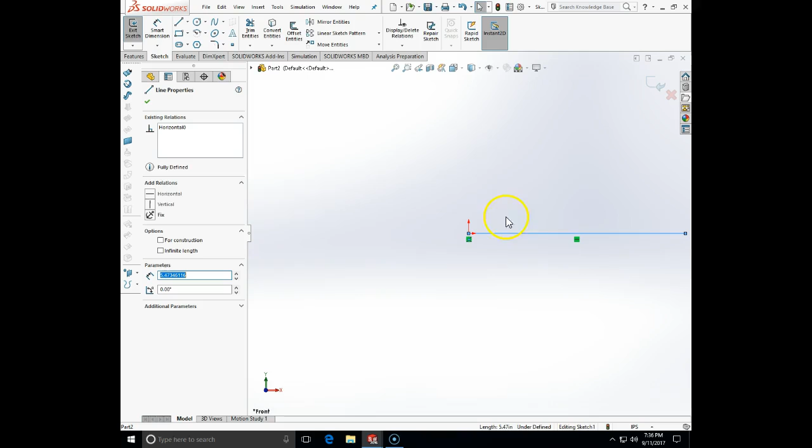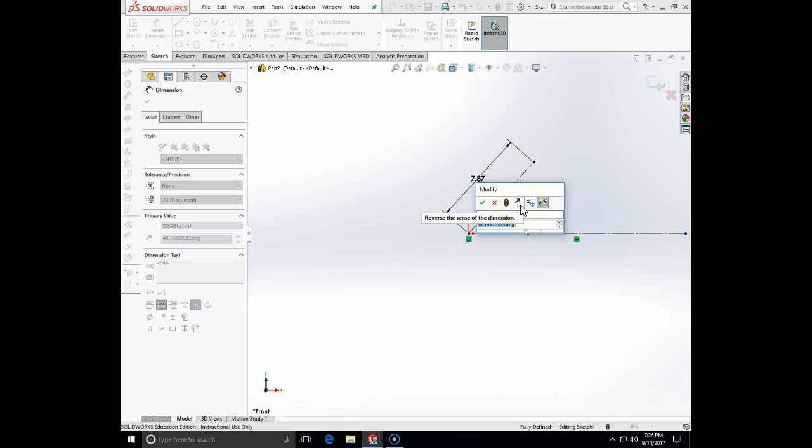We start by making a sketch in the front plane, making a horizontal axis, then another axis from the origin up with an aligned length of 200 millimeters and an angle between the horizontal and the length of 60 degrees. Change my units to mmgs and continue sketching.

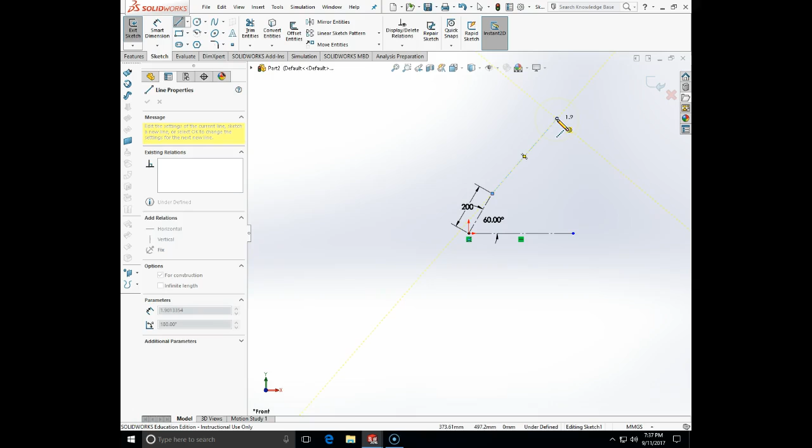Now from that point I make another construction line with an angle of horizontal of 15 degrees and an aligned length of 400 millimeters. This will define the basic geometry of my arm.

Now I'm going to put the construction lines. I will start by placing circles, and then connect the circles with tangent lines.

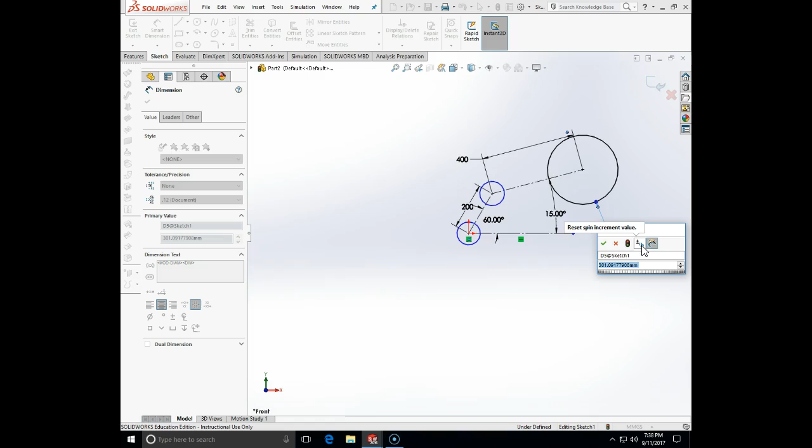Specify that this circle has a radius of 12.5, so that's 25 diameter. Is that supposed to be shown on screen?

Okay, we do the first polar line, then the second polar line. The first polar line is 60 degrees with a length of 200, and the next polar line has a length of 400 and an angle of 15 degrees from the horizontal.

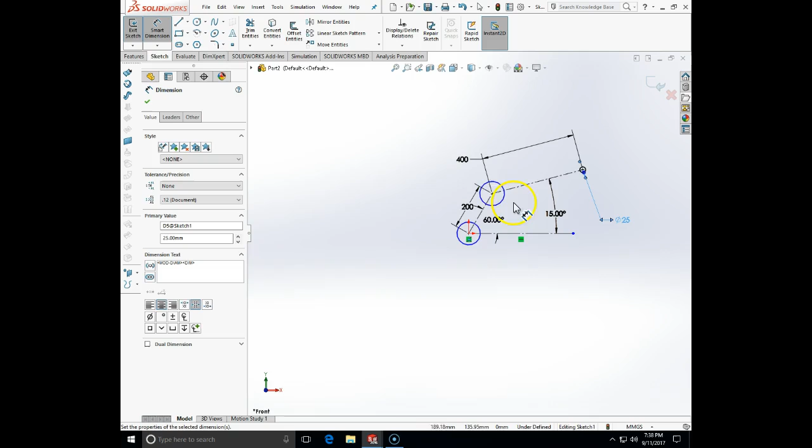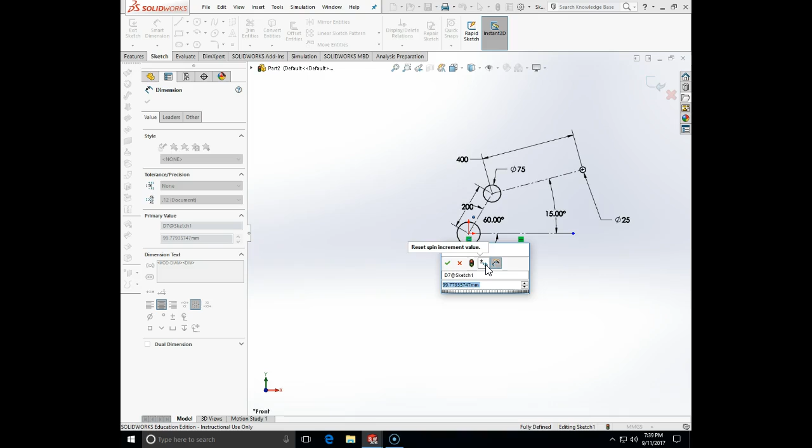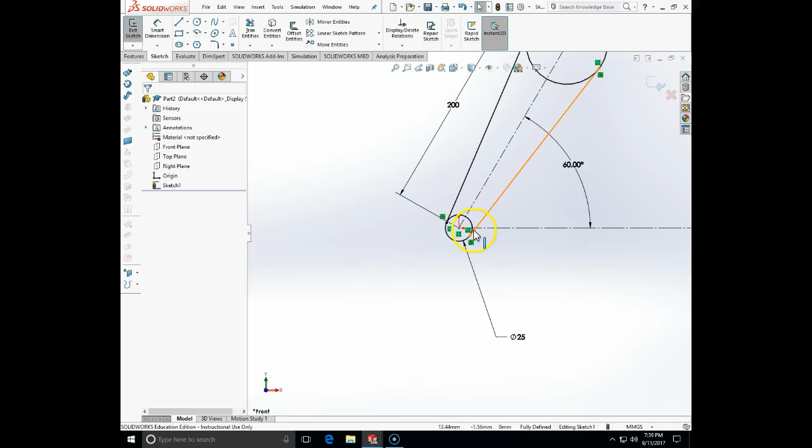Now we will connect the circles with tangential lines. As you can see, as I hover close to the circle and attach to it, then go to the next one, it automatically inherits the tangency relationship if I hover in an area where it will be tangent.

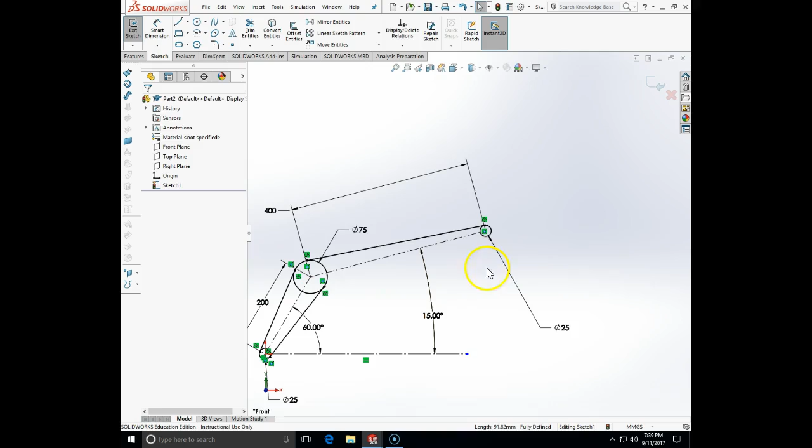Now same thing from here, need to zoom in a little bit. See, it's tangent and coincident, tangent and coincident, and the same things will apply.

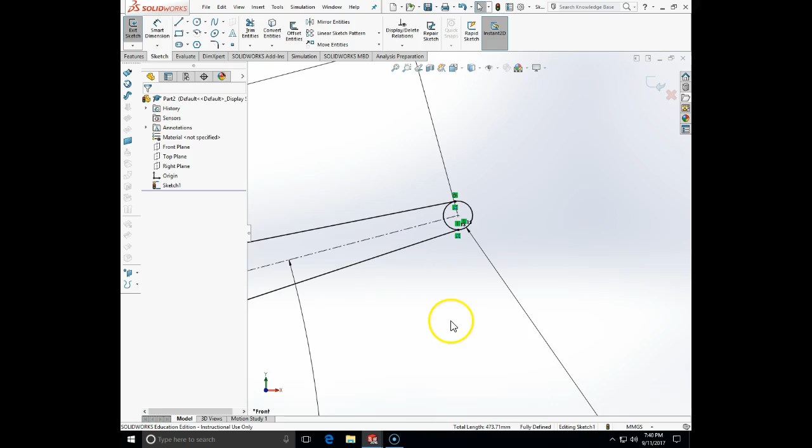At the bottom we need to click on the circle and circle to make them tangent, and here I'm going again to click line and circle. Actually, this is already set, okay.

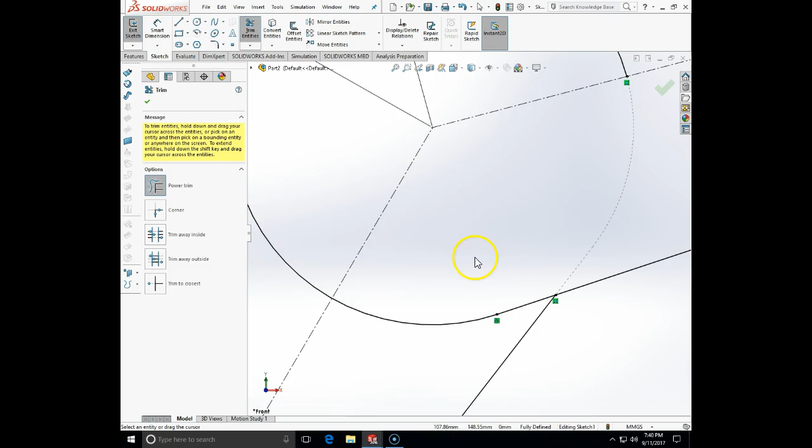Now what we can do, we will have some area of confusion here. So if I go to power trim, I can successfully trim these lines to clean out this sketch. As long as I just trim the circles, it should stay fully constrained.

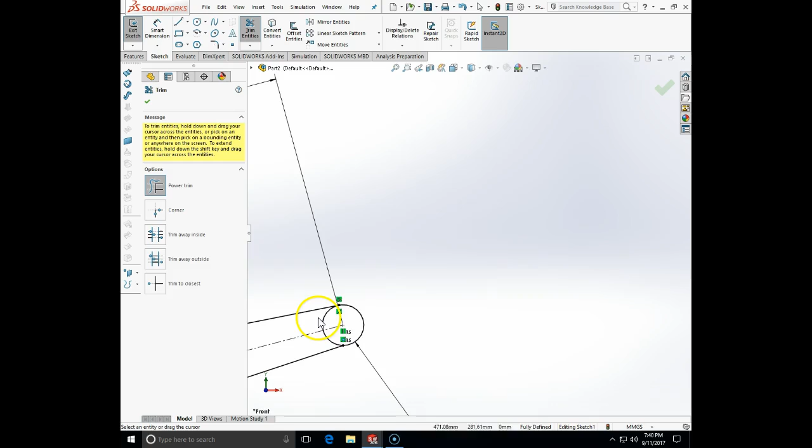Now I see where the problem is, so I will erase this vertical relationship and make this tangent instead, which fixes it. Okay, so here is my cleaned out sketch.

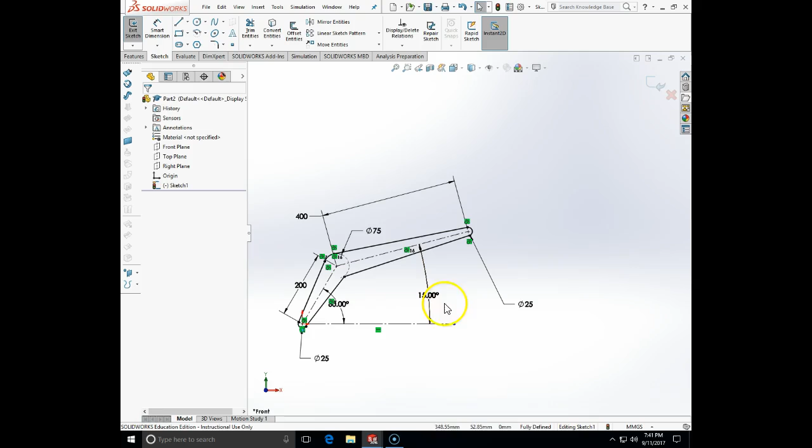Now I'm going to extrude this sketch for 10 millimeters, and create a new sketch on top of it that will define the pivot point. So I will close this sketch, extrude the object for 10 millimeters, then start a new sketch on the top surface.

I'm going to place 3 points, 1, 2, and 3. Now I'm going to make this point and the bottom circle concentric, this point and the middle circle concentric, and the last point and the circle concentric. And this defines my arm.

Why did I create this point? These points I will use to create a functional assembly by mating point to point. Going to close the sketch, and I will save this as an...

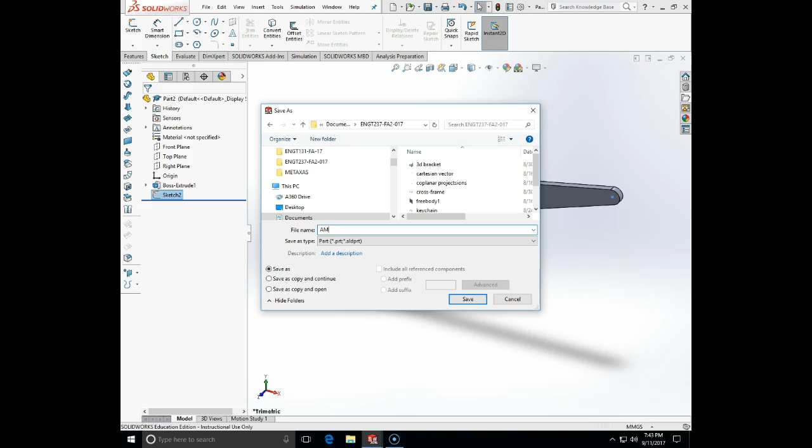I will call this one the arm-press.

Now I'm going to create the next part, and the next part will be my link. The link is a very simple sketch. On the front plane I'm going to use the slot, the straight slot.

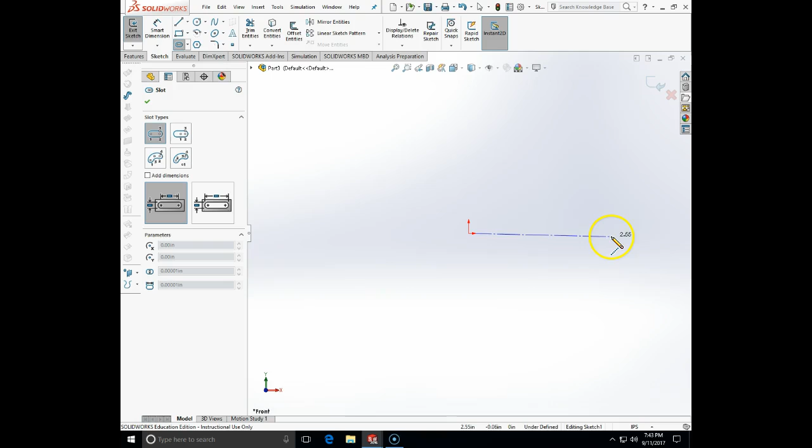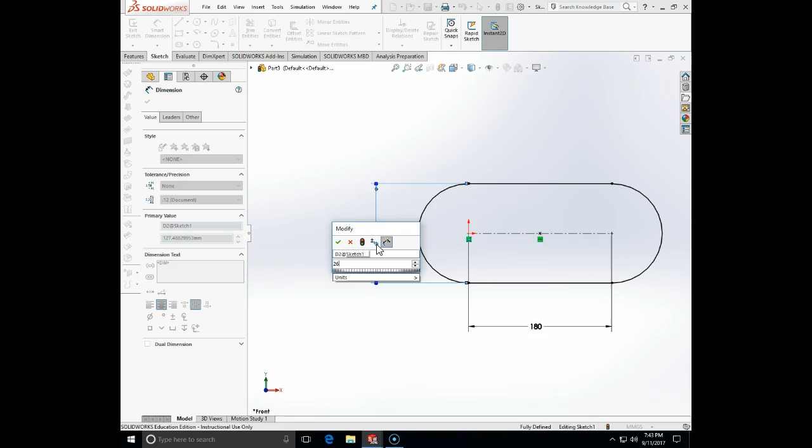Again I will need to change this to millimeters units. The center distance of the slot is 180 millimeters, and the diameter of the slot is 25. And I'm going to extrude my link, again 10 millimeters.

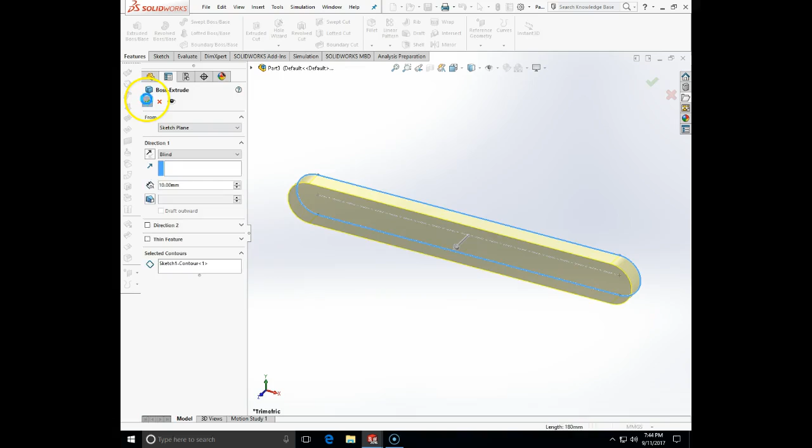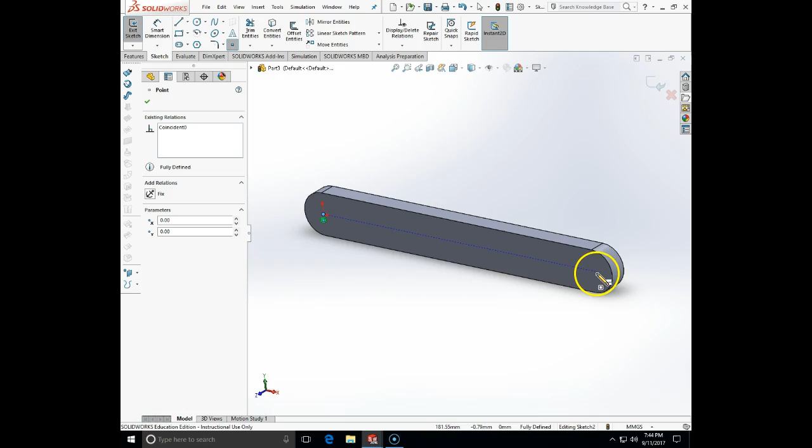I'm going to create, now on the front plane, here 2 points: one concentric with one end of the slot, and a second one concentric with the other end of the slot, and I'm going to save it.

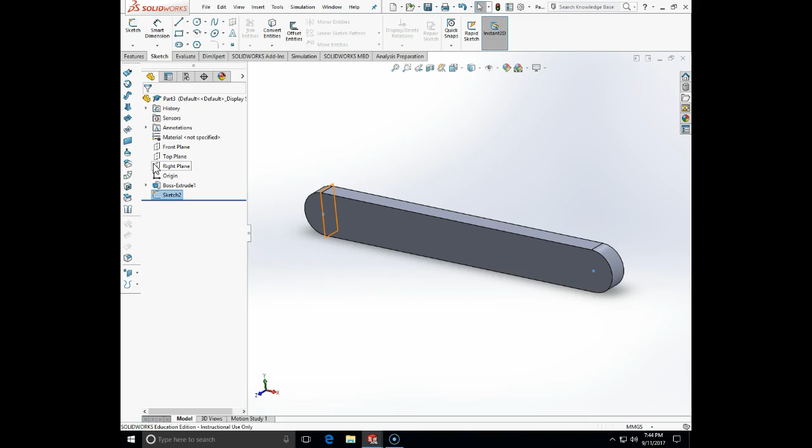One thing that will make it easier to assemble later is to avoid doing the z-axis. Actually, we don't need to do that for now. Let's see it this way. We can do it. Okay, I will save this as a link, save as link dash press.

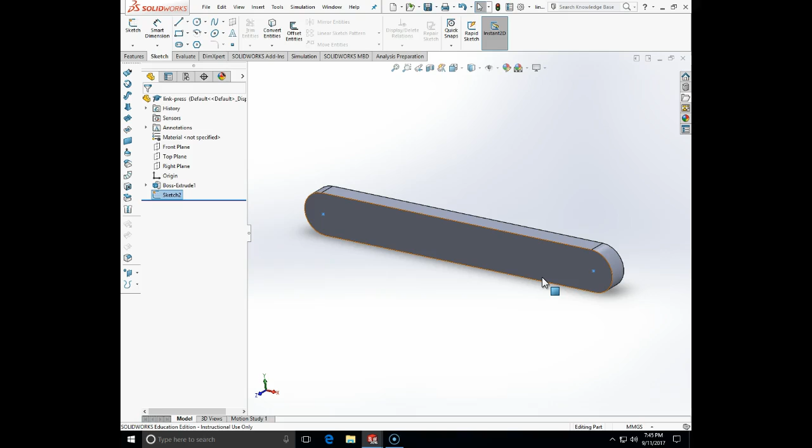And the last part will be a die, and then we are going to assemble those together. The die is also a very simple part. Going to make a very simple center point rectangle.

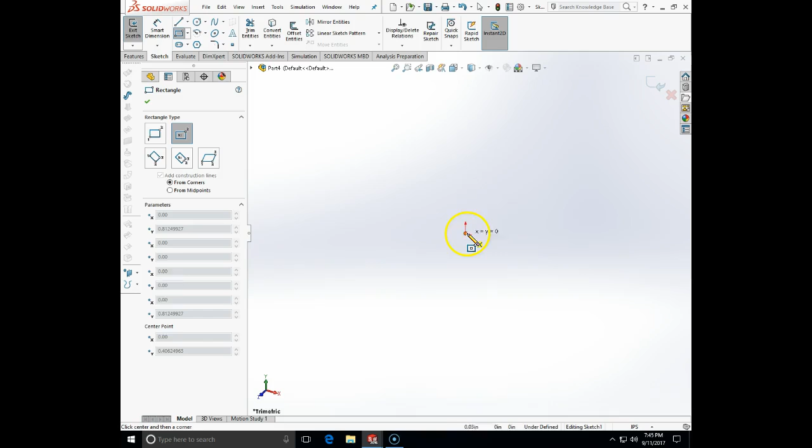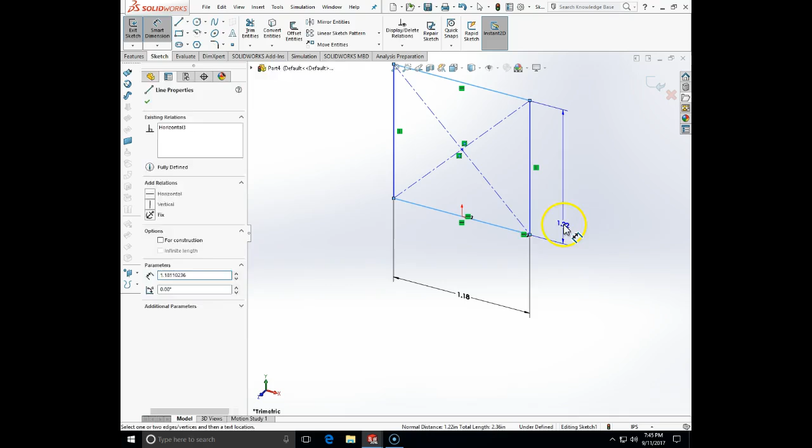Going to create the length of that rectangle to be 30 millimeters with a height of 15 millimeters, and we'll have an arc starting from the middle point, and we will say that the center and center are vertical. This fully defines this piece.

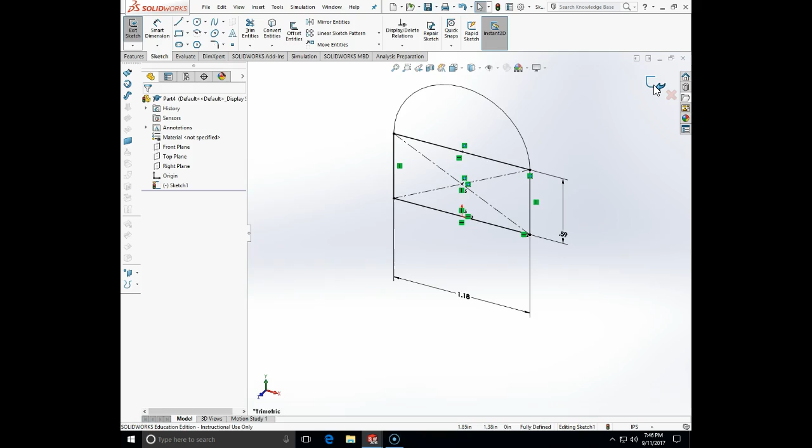And I'm going to make also another point here, so I'm going to extrude this piece for 10 from a mid plane. Go to the extrude, 10 millimeters, and it will be a mid plane, and I will choose both options.

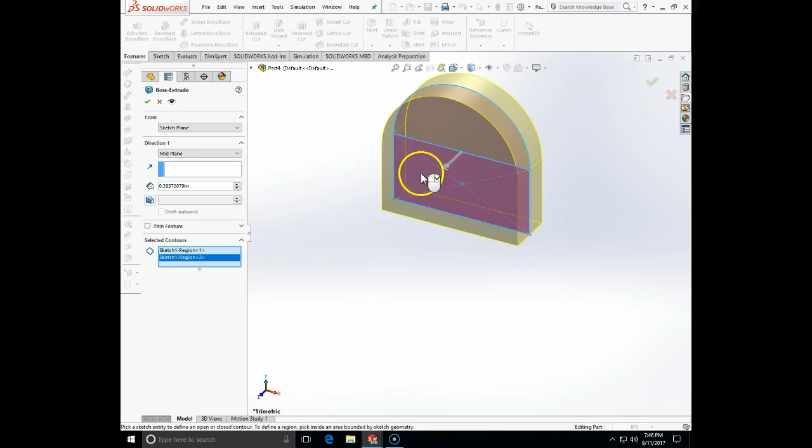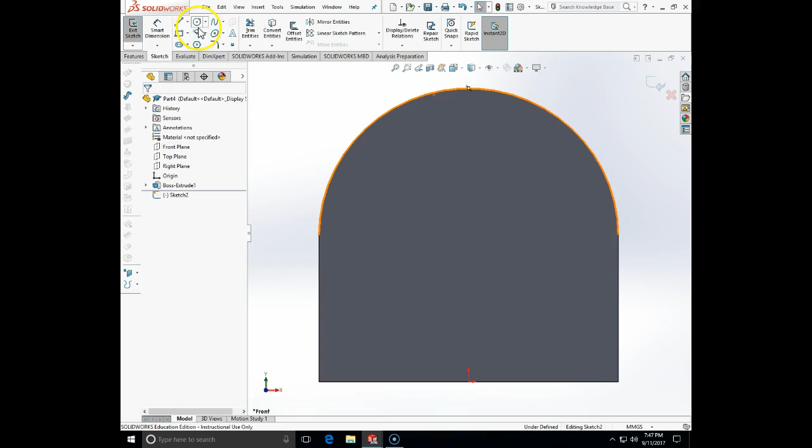Now we are going to create the bottom circular piece, and that will again be the sketch on the front plane, and this time I'm going to make a revolved piece by making a rectangle.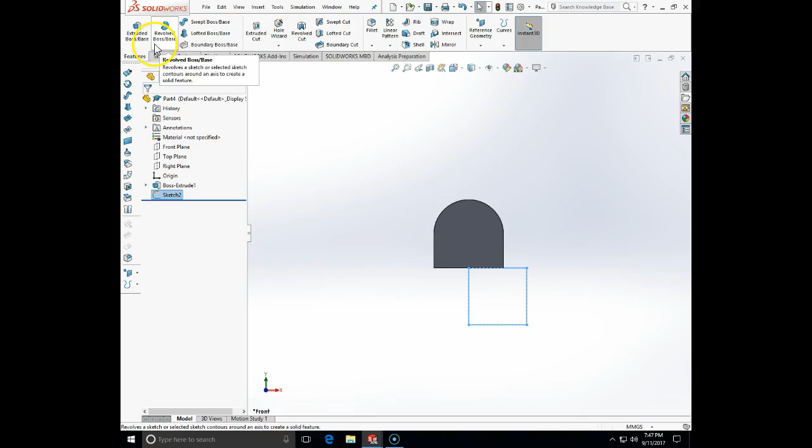Which will be 25 millimeters by 25, essentially a square, and then revolving it around this axis. So I close the sketch, feature, revolve boss base, axis of revolution is the left edge, and here is my die.

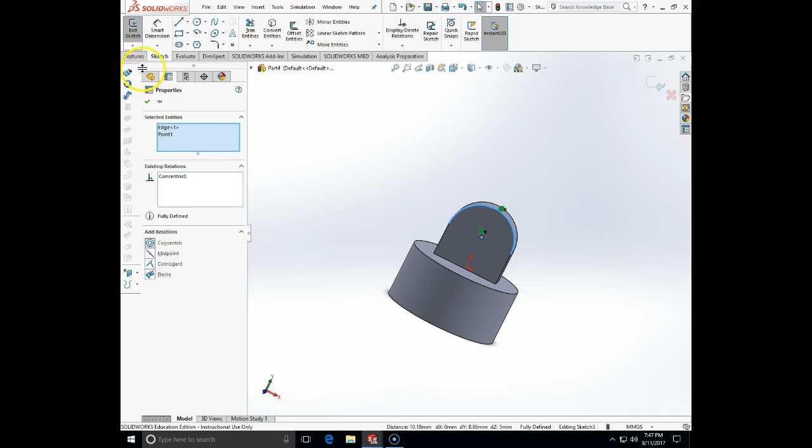I'm also going on a front plane to start a new sketch, and I'm going to define a point which is going to be a center point of the die. And I'm going to save it.

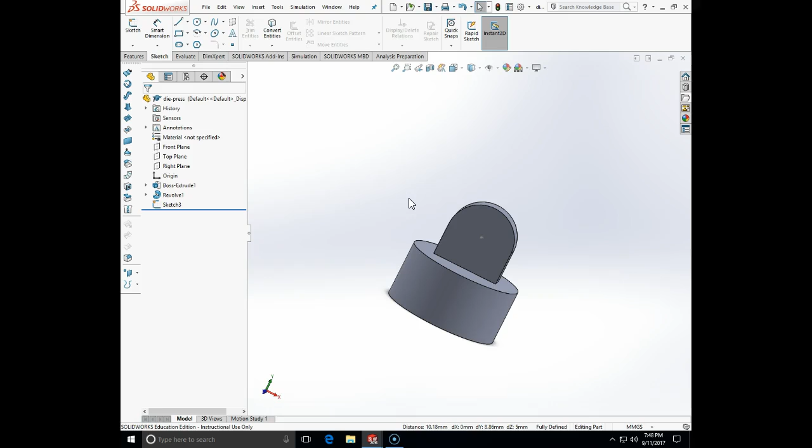Now the key is to make the right mates in assembly. So let's start making assembly, let's start making a new assembly. And we are going to insert all of the components. So we'll start by arm, and we just drop them inside.

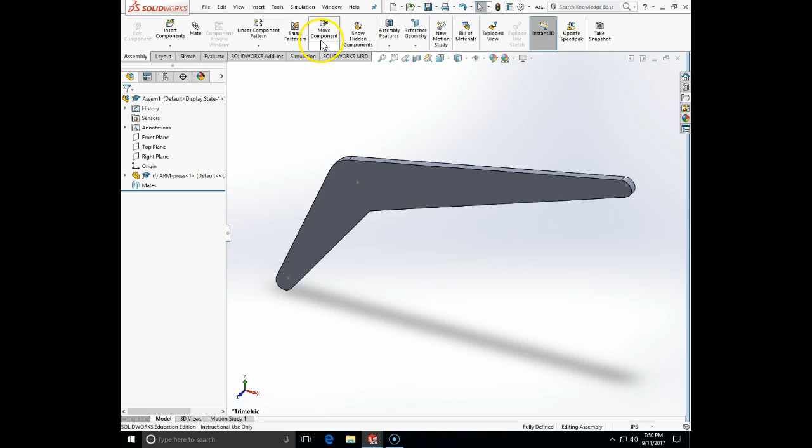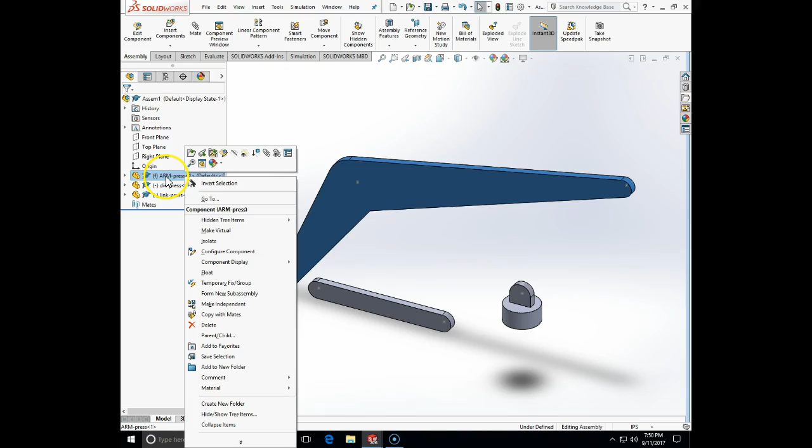I will insert another component, die press, and I will insert another component, link press. Now we need to make our arm float, otherwise it will not work. So right click on the parametric tree for the arm, and let's make it float.

Now we will make everything not as a completely correct geometric model, but actually as a 2D model which will have the right kinematics. So to do that, we will make all of the front planes coincident.

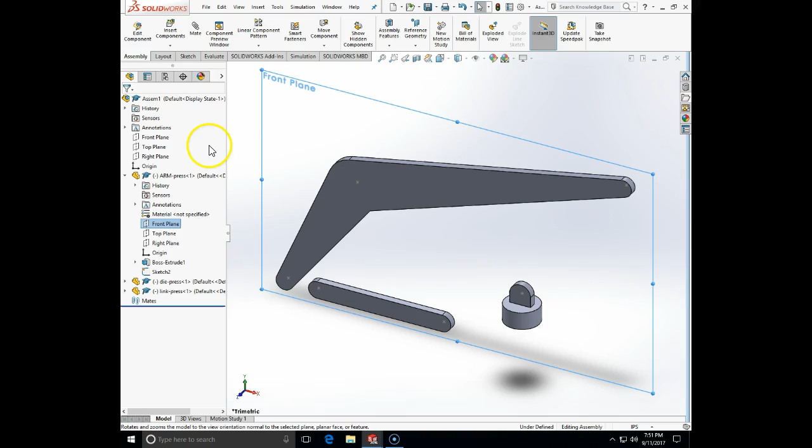So I'm going to choose the front plane of the arm and press shift and my global front plane, so mate. I will choose the front plane of the arm and our global front plane, and I will make it coincident.

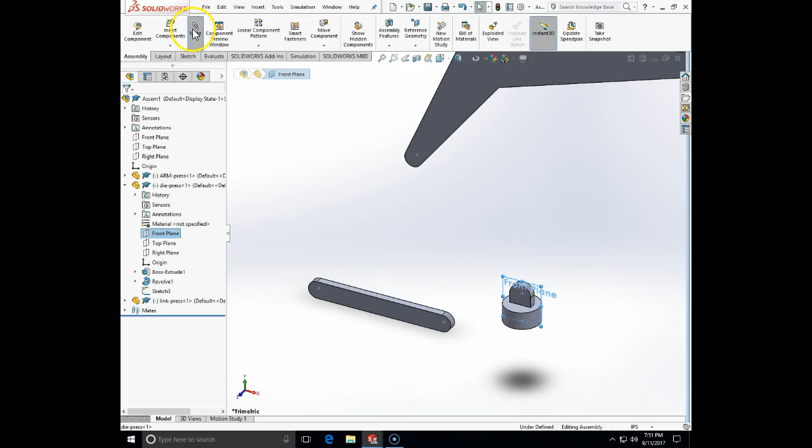Now I will repeat the same thing for the front plane of the die, mate it with the global front plane, and finally I'm going to do the same thing with the front plane of the link, and mate it with the global front plane.

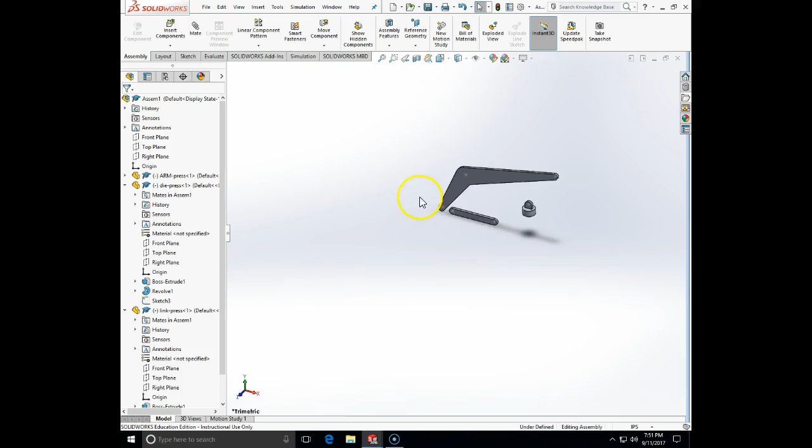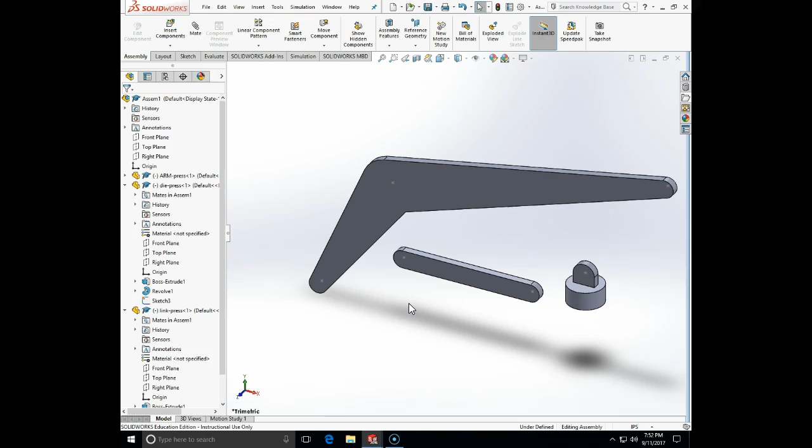After I did this, I'm going to start actually assembling the functional kinematic sketch. So I'm going to create a mate point between the left point of the arm and the global origin. I will choose the left pivot point of the arm and the global origin, and make this a coincident mate without aligning the axis.

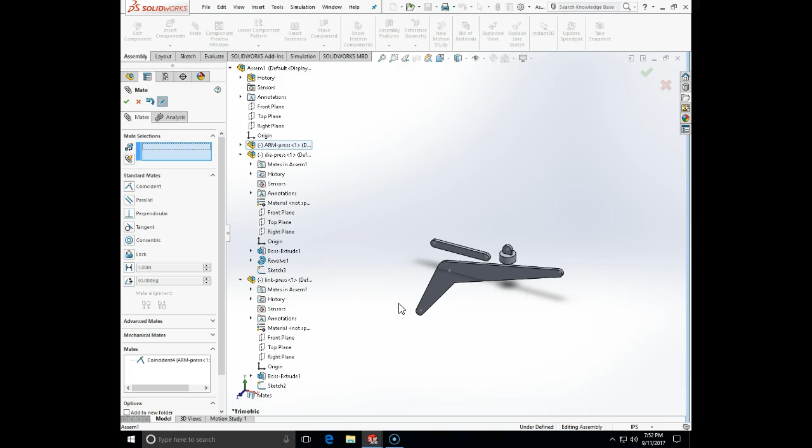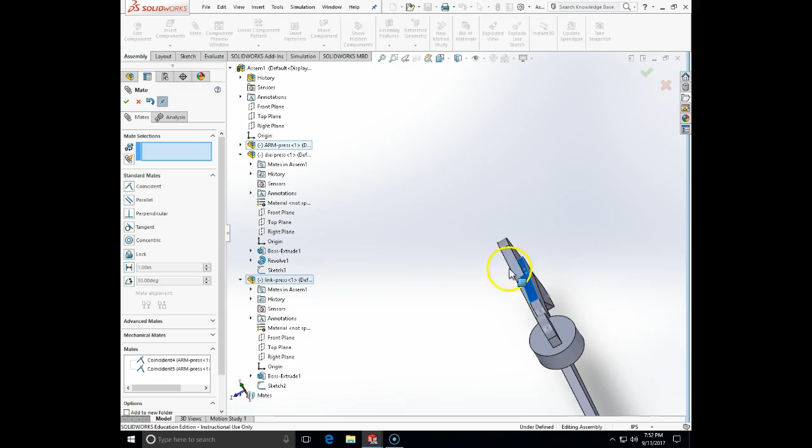Now I'm going to create another coincidence between this point and the center point of the arm. And let's see, and then coincident with the other point of the link and the point on the die.

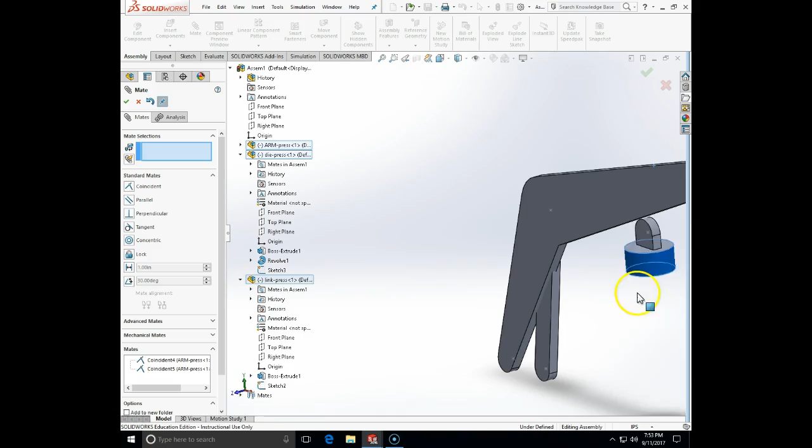So I'll drop down the die, and I'm going to make a coincident mate between this point and that one.

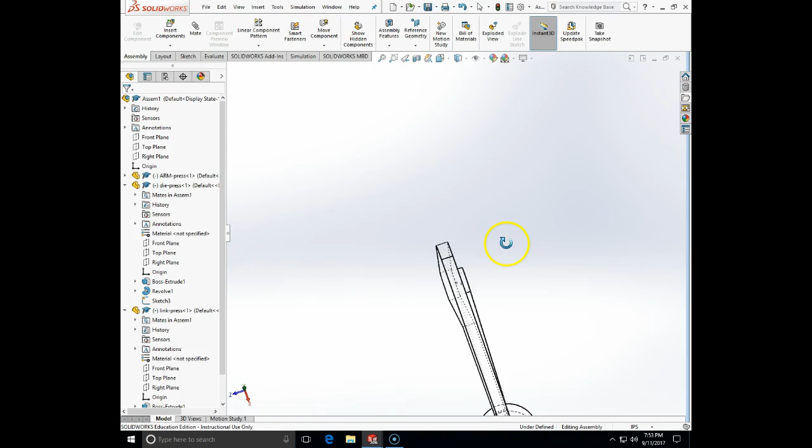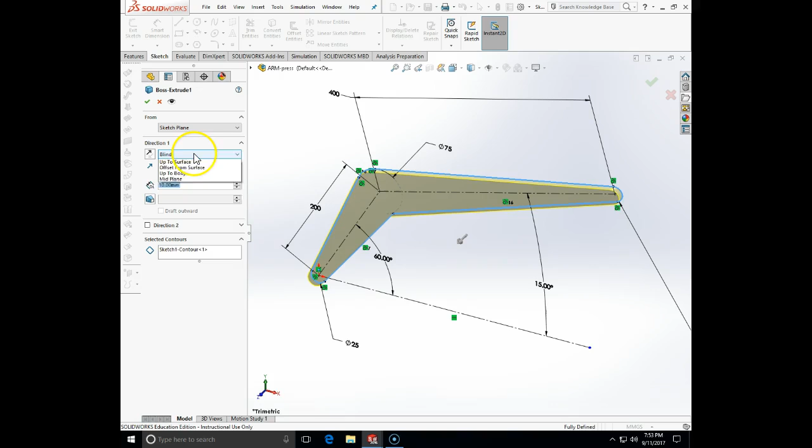Alright, so we have one thing that we need to correct here. If I go here for the arm, if I choose the global, okay, if I made it from the mid plane, then it will work properly.

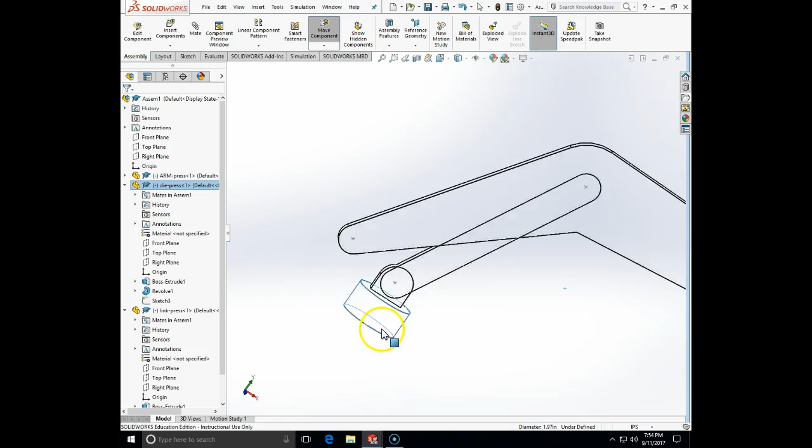Okay, now this is in reality a 2D model. So the kinematics looks right, however we need to constrain some other motion in order for this to be a feasible model. So what else don't we have constrained?

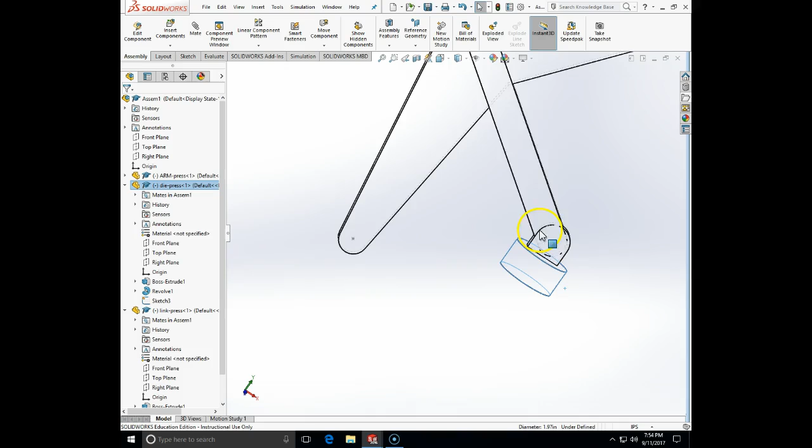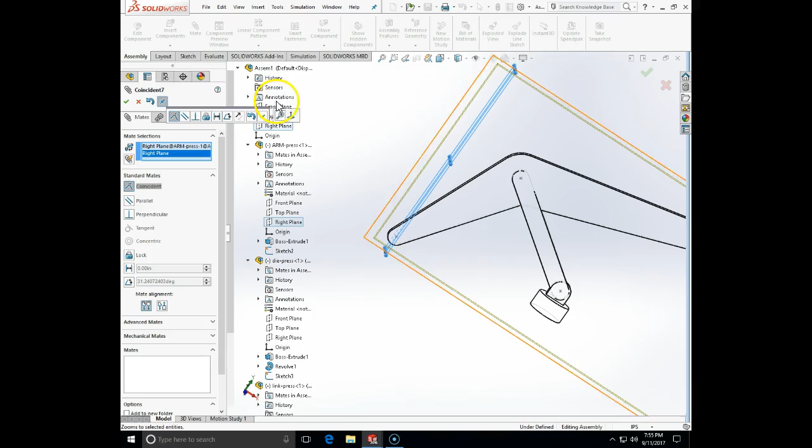We need to put a mate between the right plane of the arm and the global right plane. This will fix the arm in its initial position. So if we look at the right plane of the arm, I'm going to mate it with the global right plane, and I'll undo that mate later. This is just to set up the right geometry for the start.

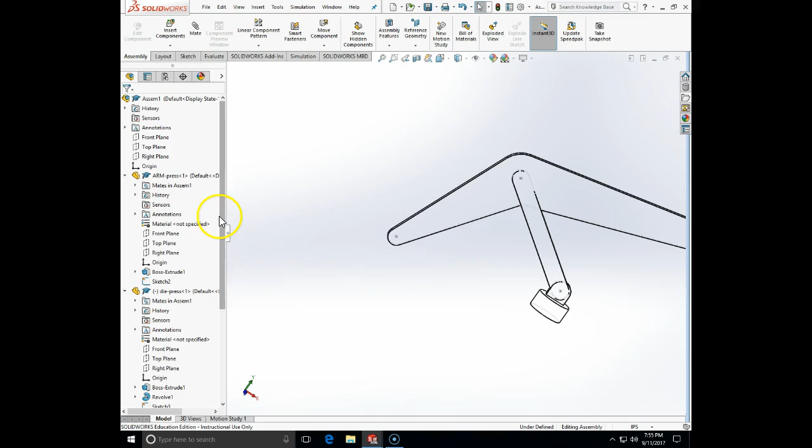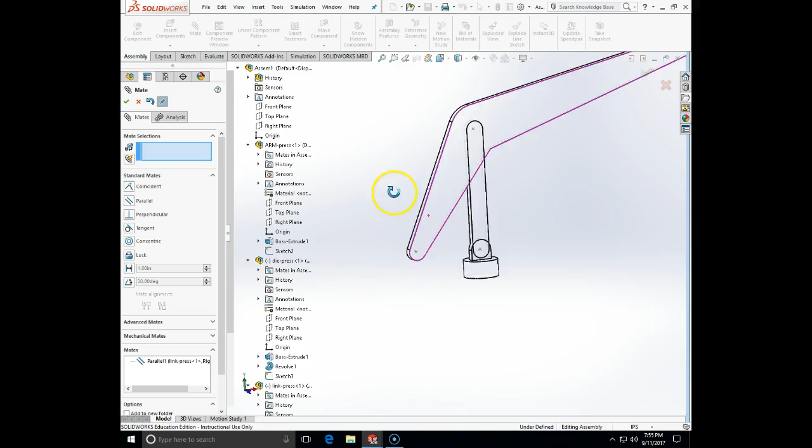Then the top plane of the link mates with the global right plane. Let's see if that's correct. Yes, okay. And here is our initial position. That will be our initial position for the analysis, because otherwise that thing floats. So that's our initial position for the analysis.

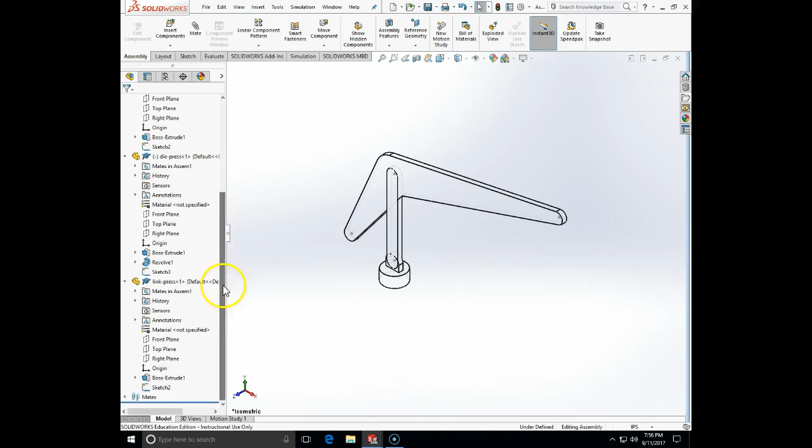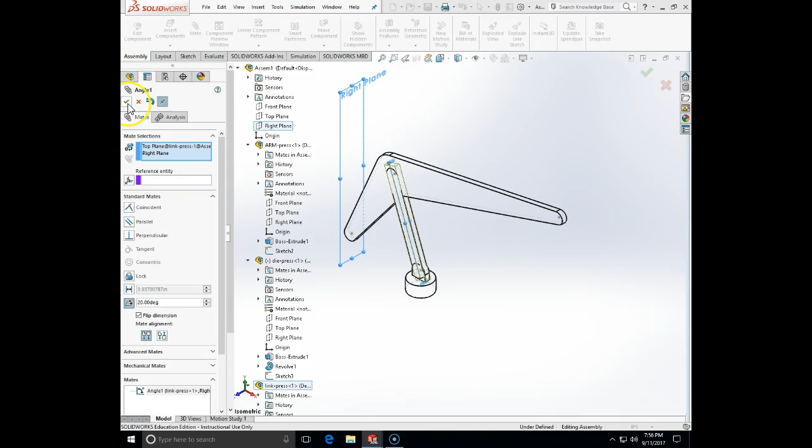On the second one, flip dimension here. Okay, that's now our initial condition, correct.

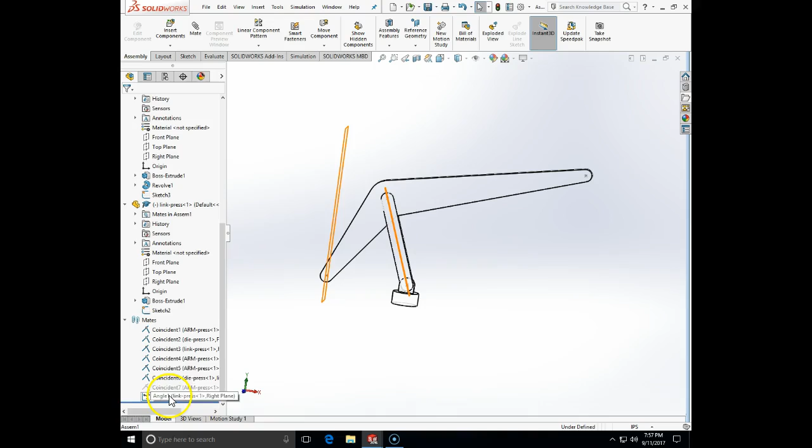Later on we are going to suppress these, and actually we can do this now. If I click the last coincident mate and this one, right click, I'm going to suppress. Going to those mates, suppress this one, suppress another one. However, now I need to be careful not to move anything.

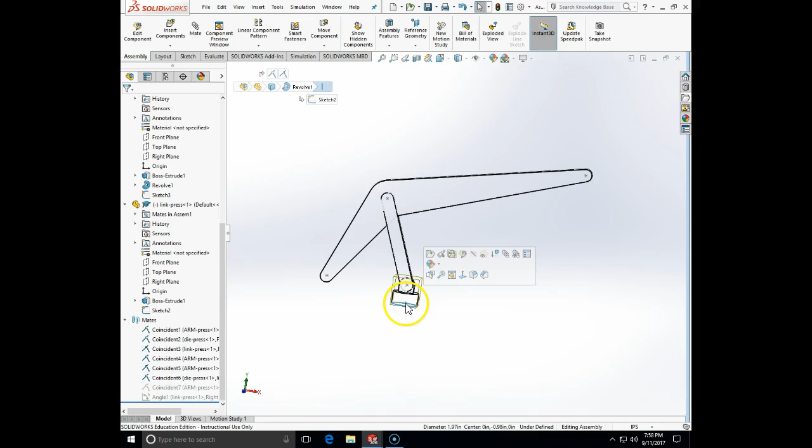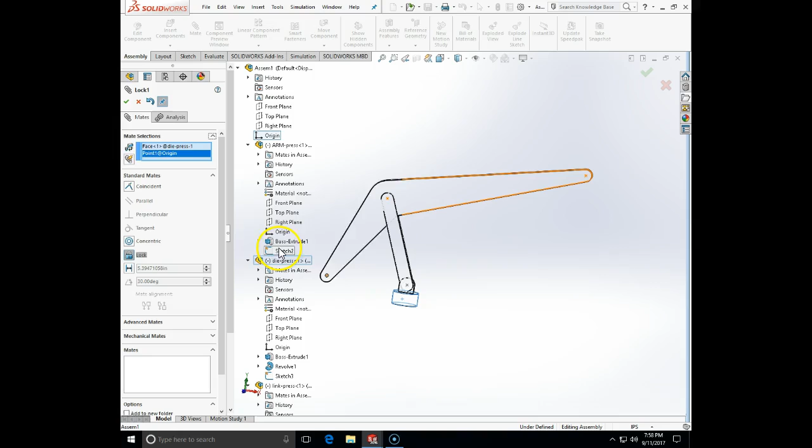Now the face of the plane, and we need to do the face of the die, and the global origin, and we will click lock to keep this one. So the mate, not the edge, will be a face of the die mated to the global origin. It will be locked, and that will keep the die in that condition, maintaining the geometric constraint.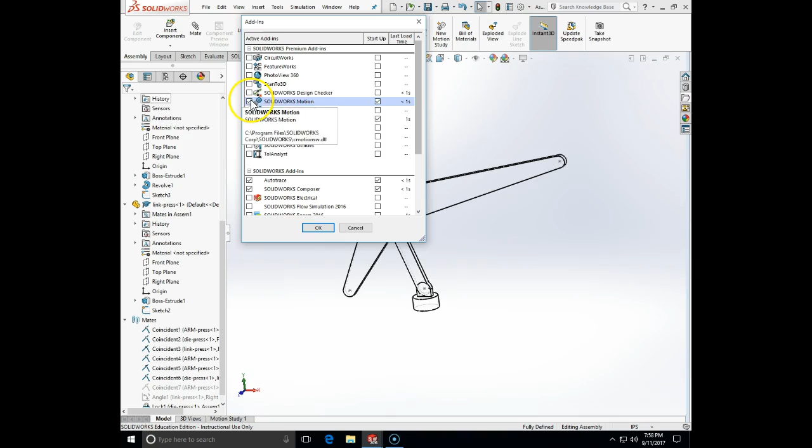Now we are ready to start doing the motion study. We first check that we have the add-ins installed: SolidWorks Motion, and this should be okay. Now if I click on the tab for the motion study, here is my motion study.

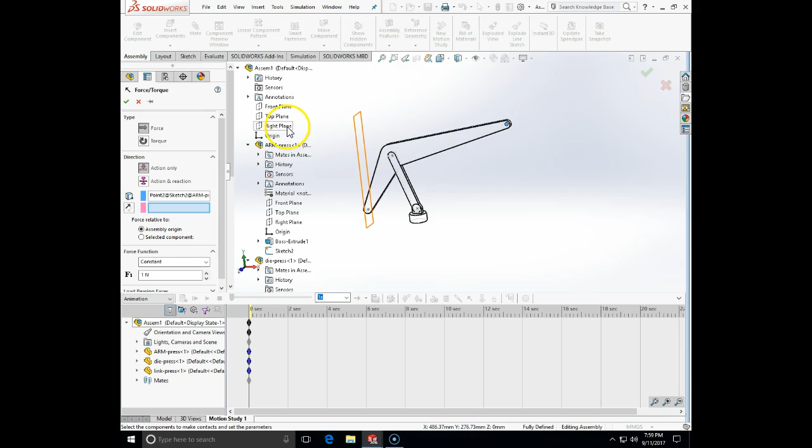Let's check the force. I'm going to first put the force here, looking downwards. I'll click on force, and first choose the MMGS units. Going to check, click on the force at this point, action only, and then it will be normal to the global top plane, looking downwards. The initial force is 250 newtons and is constant, so we place that force.

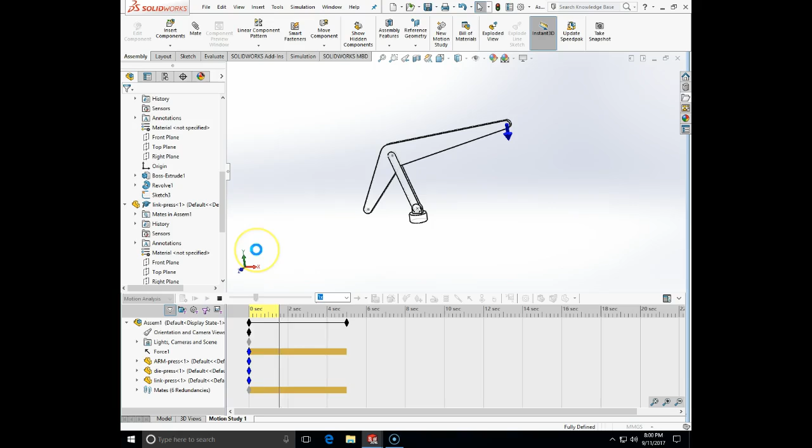Now all we have to do is click calculate. We will choose the type as motion analysis. And if we click calculate... first, what was the first good sign? Okay guys, what was the first good sign? It didn't move. That means it is a static case.

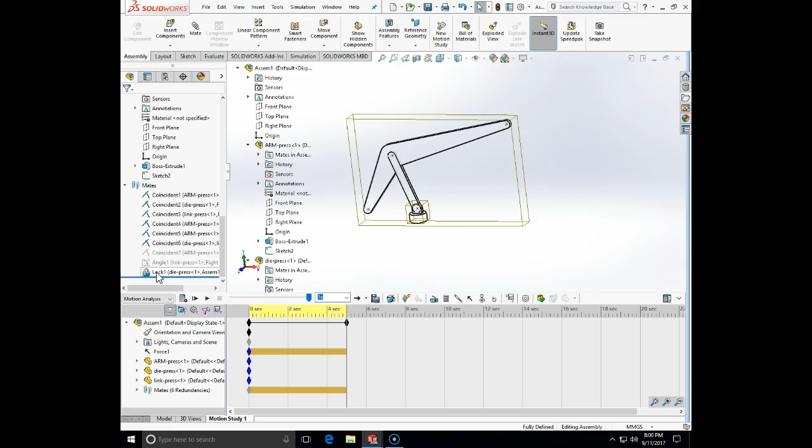Now what is actually going to be the reaction force in my two constraints? What are the two that define the... it will be the lock. For the lock mate, we will define fx and fy. So if I click on results...

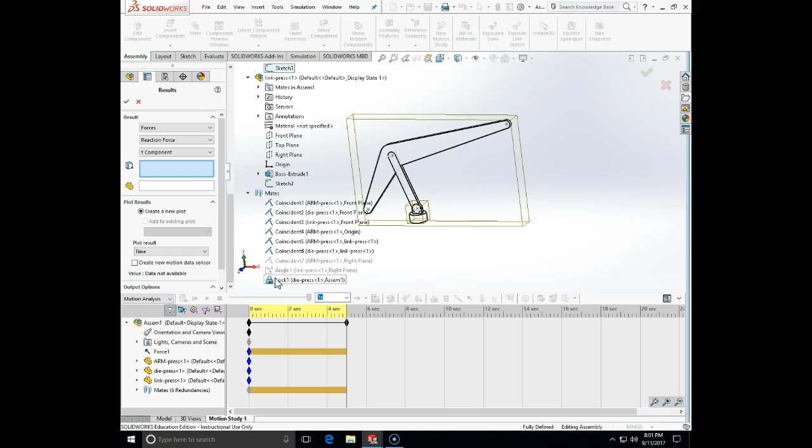Forces, select the subcategory. Let's see what is the force in the y direction. That will be the reaction force, y direction. Select one mate simulation element. I'm going to choose the lock one, and that will be in y. Let's check the values. So what is the value here? 746, and that is exactly what we get in an analytical solution.

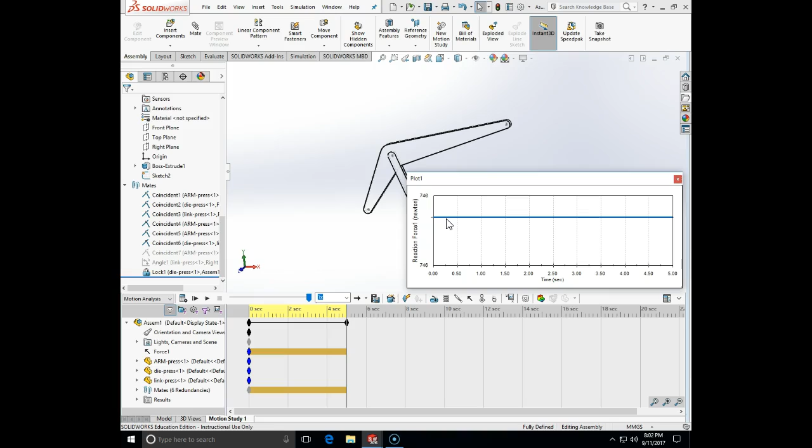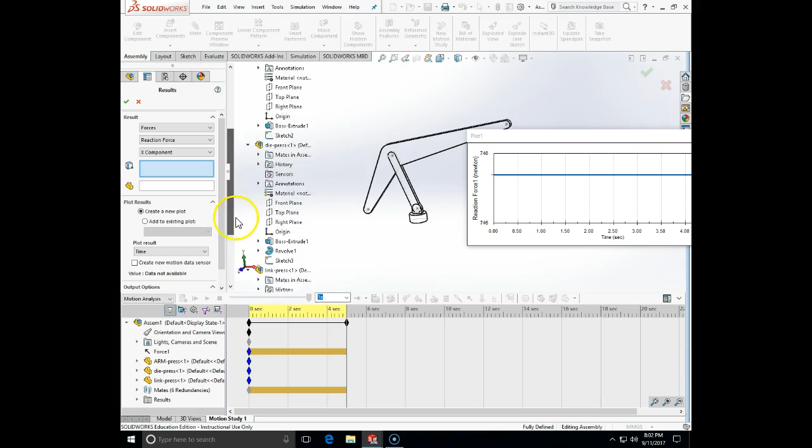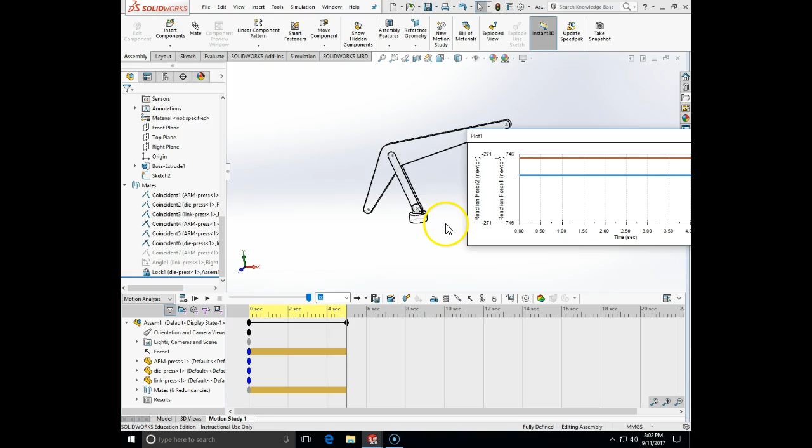Now in that same fixed constraint, if we check for the x value, what will it be? It will be 271 newtons. So let's do it. Again, I'm going to choose my result window, choose force, choose the reaction force, and this time choose the x component. I'm going to choose the mate lock, and you can see x, y, z, and this will be x. We can, if you want, add it to an existing plot, plot 1. What is the other one? Negative 271.

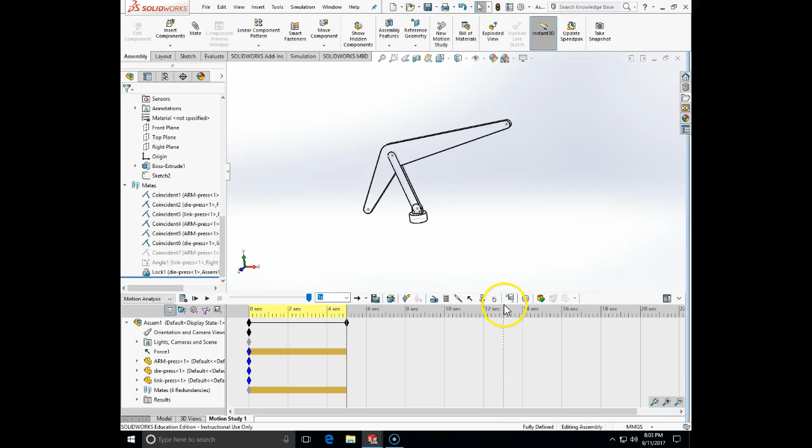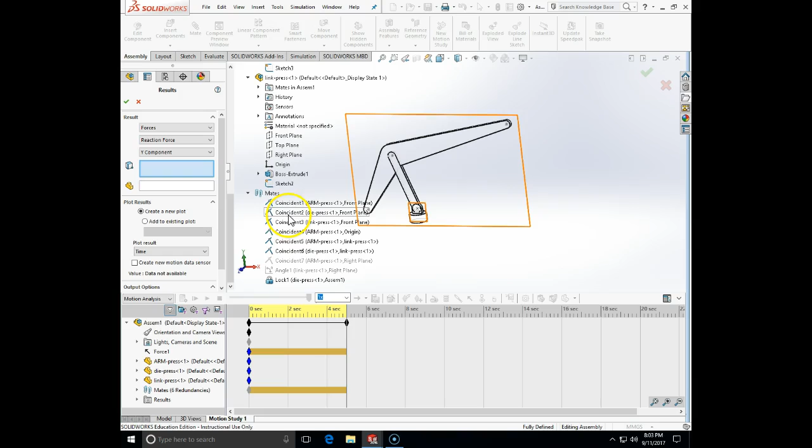Okay, and now we can also explore the reaction force in any other pins. So let's explore the reaction force in the pin here, and the reaction force there. So if we go here, reaction force, let's say the y component, and that will be just to find the right mate. How about this guy here? And that's exactly what it is—the reaction force is downwards, 496 newtons.

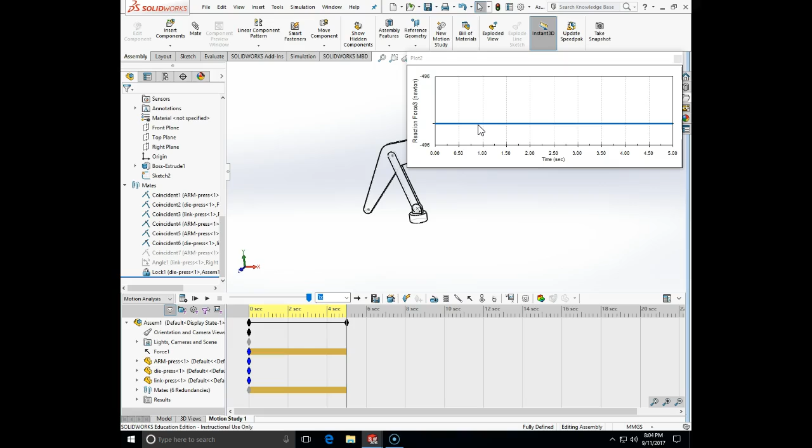And so on. Now we can draw the free body diagram by hand or by sketching it in SolidWorks, and you will see that it is correct. So what is this model showing us? From those simple examples we did before, like brackets and a simple arm, now we can actually use this to analyze the forces as well as torques acting on mechanisms in a steady state. That's actually one of the roles of statics—we can look into the loads on mechanisms. Okay, now it's for you to complete this exercise.